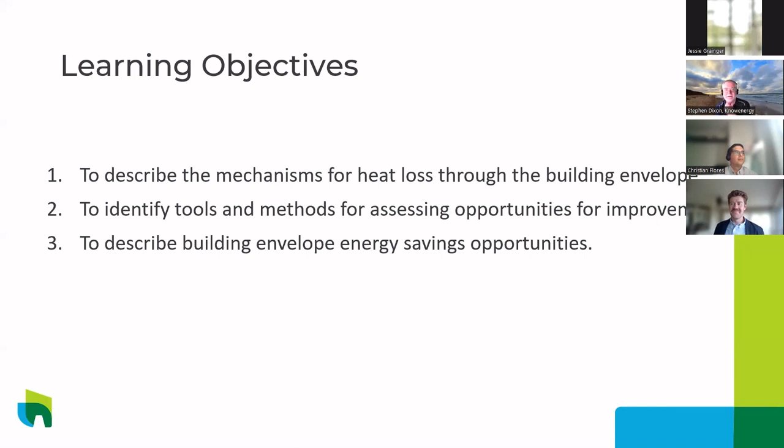Christian, we can move to the agenda very quickly. So what we'll cover off here in our agenda this morning, I'll let you get to the next slide there, is some very basic ideas around heat transfer principles. We'll look at the building as a system. We want you to think about your building as a system, not just, I got to fix those windows, but what can I do in a much more holistic fashion? And certainly getting to net zero, we have to take this holistic approach. And as a result, there is an order. And I'll speak to that one, and Christian will speak to that one too.

But basically, I have 3 words that I use. It's not written on a slide anywhere. Waste, energy we don't need to use. Efficiency, how well we convert the energy from the purchased or the acquired form to the end use form. And then supply, the use of renewables. So that says, before we put those solar panels or that renewable energy in, let's not waste energy, and let's be as efficient as we can.

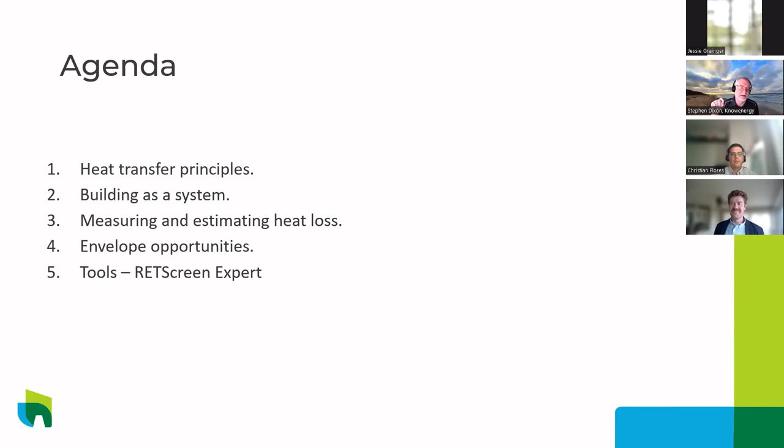So it's important to understand our building as a system holistically, measuring and estimating the heat loss, right? Where's it all going? What are the largest consumers? And it may be surprising. Sometimes we think certain things are the larger consumers, but when we actually get down to it, they're not. We'll take a look at what the envelope opportunities are, and then we'll finish off very quickly on RETScreen Expert as a tool. I'm going to show you a tool that you can use. You'll be able to jump in tomorrow and actually play with this one if you choose to do that. So Christian, let's move over to the slide on thermal heat transfer basics. For those that aren't technical, this slide will be a bit of an introduction.

For those that are technical, this is going to be like second nature. But there are fundamentally only 3 ways in which heat moves. In fact, there's only really 2 ways, and one is a sort of variation of the other way. So heat can be conducted between 2 bodies. We're all familiar with that. So in order to stem that flow of heat in the building envelope, we have to use an insulator. We're all familiar with that.

But there's another very important form of heat transfer, and that is that a body can radiate. Stand near a stove, you feel the heat radiated. A lot of people think when they stand near a cold wall that there's a draft, but it's actually the heat radiating from your body to that wall, right? So those are very important mechanisms.

Now, if you put a hot body in contact with, let's say, air or a liquid, you'll end up with what's called natural convection, because as the liquid or air heats up in contact with the body, it will rise, right? We know that. Or if we force liquid or air to come into contact with the body, it will transfer heat. So what we call convection, whether it be natural or forced, is really just a variation on that theme of conduction. So those are the ways in which heat moves.

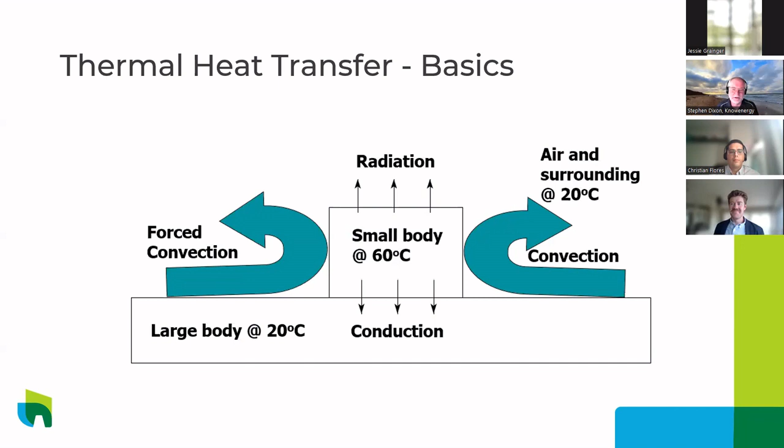Now, on the next slide, if we look at the building as a system, there are many, many ways that heat moves into and outside of a building. And certainly, again, we have to build an envelope. And the envelope really means a boundary, right? And we want to consider that boundary. And boundaries are very important in building envelope analysis. Christian will speak to that one.

So I'm going to let Christian take over here, and he will sort of gauge his time through this, because there's a lot of topics to go through here and not a lot of time, but basically what we want to do is think about how we can modify any of those heat flows out of, and maybe into a building, even including solar energy. Christian, over to you. Thank you, Stephen.

The only thing I'll add to this slide is thinking of the envelope as the skin of the building that separates the indoor from the outdoor environment helps us think about how we can actually improve the performance of the envelope. The envelope controls the heat loss by insulating materials and keeping things as airtight as possible. So when we look at retrofit projects, that's really what we're trying to focus on.

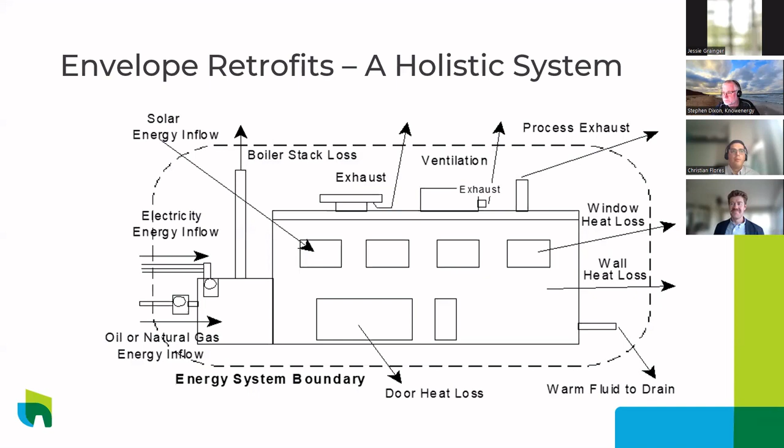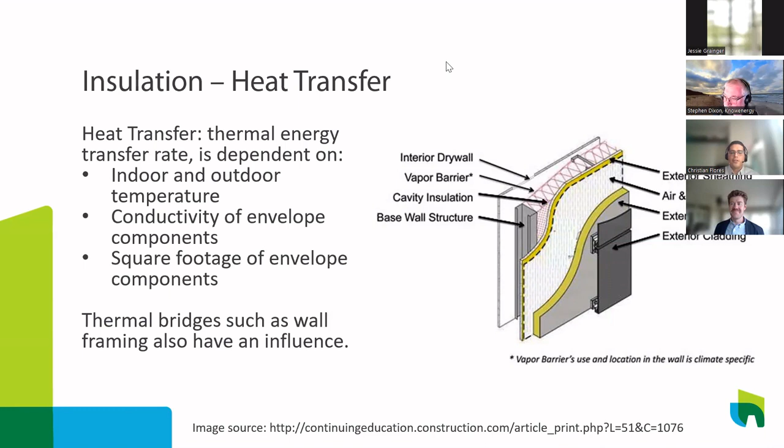The other thing about the fundamental physics of heat transfer is that heat will take the path of least resistance, right? So when we have a very highly conductive material, heat will tend to go out through that material. We call this a thermal bridge. A simple way of dealing with it is by insulating the outside of the building, having exterior insulation. It's the idea of you want to wear your sweater versus eat your sweater. That is how we tend to deal with thermal bridging issues.

Now, every material has some insulating value. This is called an R value. R stands for thermal resistance. So when we talk about the R value of a wall, we're including all the elements of the wall into that number. And as you can see here in this example, the R11 batt insulation is really doing the heavy lifting in terms of total R value. But one thing that this analysis doesn't take into account is that thermal bridging that we just talked about going through the studs. And we'll see how to account for that in a few slides.

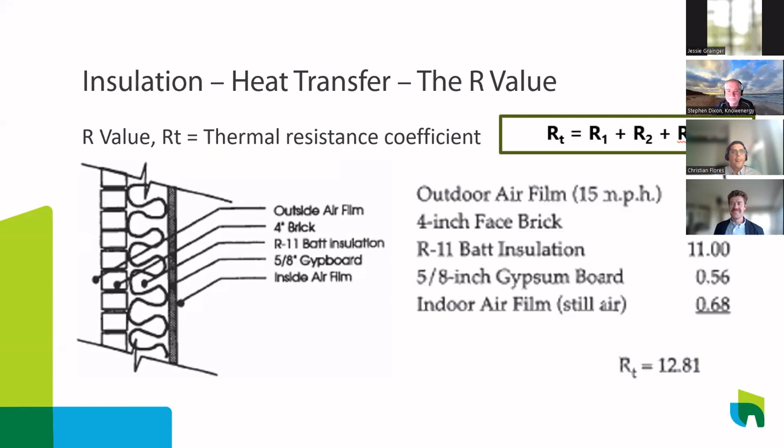So there's different types of insulation. Insulation can come in different R values. Typically, the higher R value you use, the more expensive it is, but not always. There's other factors that go into what material you use, such as vapor permeance or durability, and so on.

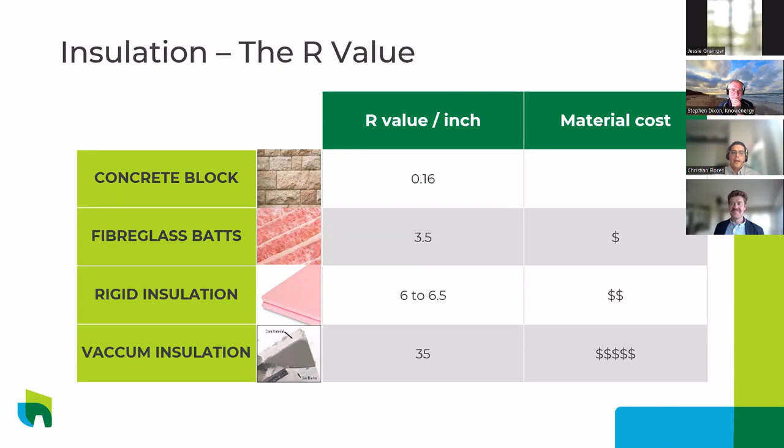The other main way that buildings lose heat is through air leakage. The control of airflow through our buildings is key for several reasons, not just for energy loss, but also to improve thermal comfort for occupants. Preventing condensation within the assemblies is a significant durability issue we run into. There's also reducing heat loss, controlling unwanted heat gain during the summer, and controlling infiltration of pollutants to maintain indoor air quality.

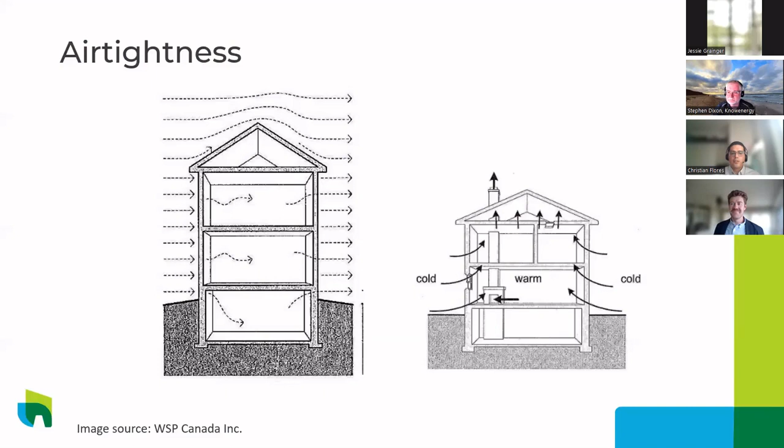Now, the mechanisms by which air leakage occurs - there are several. One is wind loads: wind can cause infiltration and exfiltration through your building envelope. We also have the stack effect, basically warm air rising, which is more of an issue in high rises. And we can have heat loss or air leakage due to mechanical HVAC interaction - if you have a pressurized building, you can get leaks through the building envelope as well.

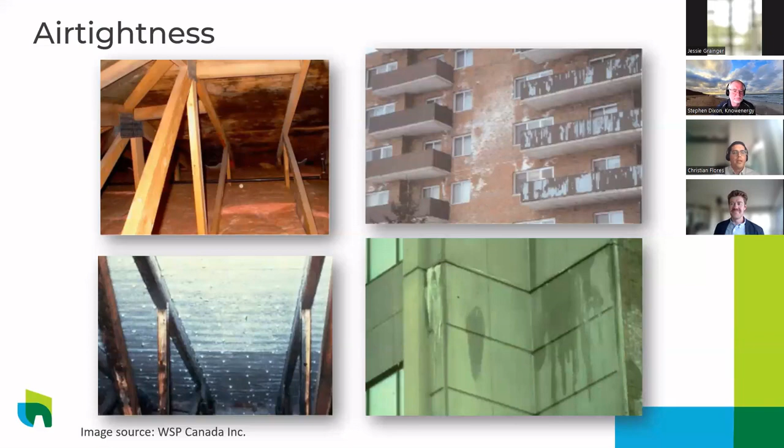Significant durability issues - we see this in walls too, with moist air condensing on brick causing efflorescence, or in precast, significant ice formation that can cause delaminations and serious safety issues. So there are other things to worry about with air leakage, not just heat loss, but that is our focus today.

Going back to the idea of building as a system, we need to take into account the thermal performance of the building envelope when we look at the performance of our mechanical systems. The insulation and air tightness of the envelope can only do so much. In our climate, we still need mechanical systems for heating or cooling, but the amount needed depends on the performance of our envelope. This is the idea behind building as a system.

Especially when we look at retrofits, increasing the performance of your envelope can allow you to use a cheaper or more efficient mechanical system because it doesn't have to condition the air as much. This is poorly understood still, unfortunately.

FCM shared some decarbonization study reports that municipalities often use, and we saw the envelope is barely mentioned in a lot of these, or sometimes not considered at all. So this is one of the critical takeaways today: when you ask for a decarbonization or GHG reduction study for your building, make sure they're taking the building envelope into account, because it's a significant item that impacts your energy performance.

I should add, Christian, that years ago I was exposed to a presentation by an architect, 47 slides on what happens when you add insulation to a building while respecting the airflow and equilibrium that exists within the envelope itself - much like the slides you showed on moisture. So we not only have to focus on the envelope as a system, but think about the interaction between insulation, airflow, and moisture. It's a very complex issue, even though it seems simple enough in a picture like this.

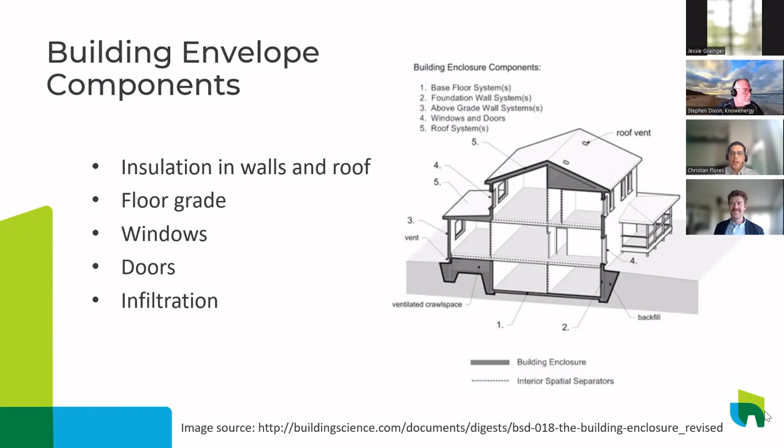And Stephen, I think there might be some questions in the chat. I can't see the chat. Yeah, I'm monitoring those, so okay, great.

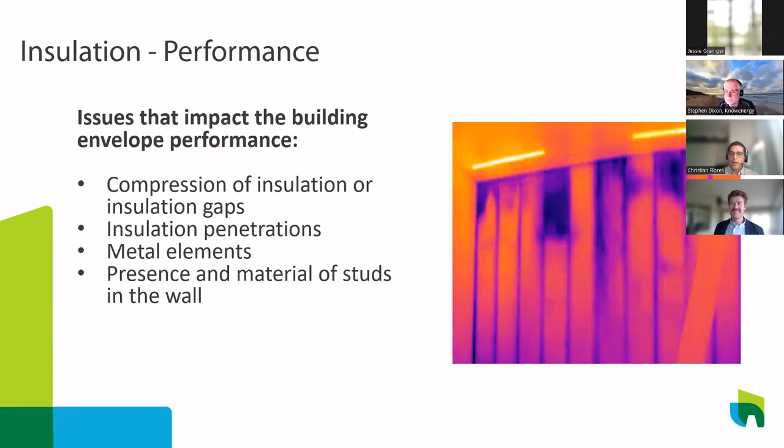As we saw, the performance of the insulation in your walls can depend on the overall envelope design and construction. Thermal bridging through the studs has a significant effect. If you have, say, R20 insulation in a steel stud wall, the studs will reduce the effectiveness of the wall by 50% easily. Other elements that reduce performance include improper installation of the insulation or penetrations through the wall that cause even more thermal bridging.

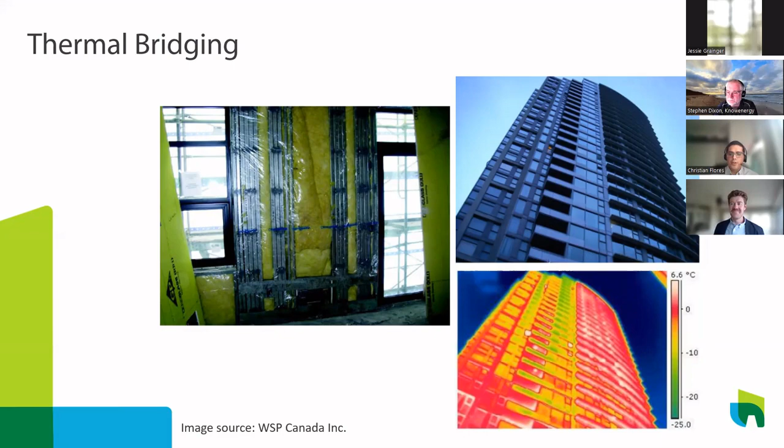We look at balconies being a huge thermal bridge, and you can see that in the thermography scan at the bottom right there. The slabs are just glowing with heat, and that's because there's no insulation stopping the heat loss through the slabs. That's a significant issue when we look at those high-rise residential buildings.

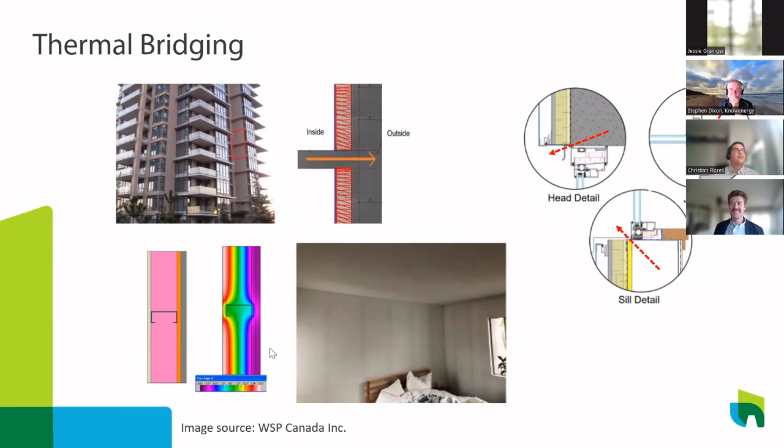Okay, there we go. So windows are a very important part of our building envelope. They provide lighting and create a connection for the occupants to the outdoors, but they're also the weakest point of our building envelope in terms of thermal performance. Glass and metal are just not good insulating materials.

We've figured out how to make better windows by adding more panes of glass and hermetically sealing them together using fancy inert gases in those cavities to reduce the conduction heat losses, using low emissivity coatings on the glass panes that reduce the radiation losses or gains. When we look at retrofit projects, the windows are often the low-hanging fruit when we look at retrofitting buildings, because decades-old window systems just don't have very good thermal performance, and we can double or triple their performance with common modern systems.

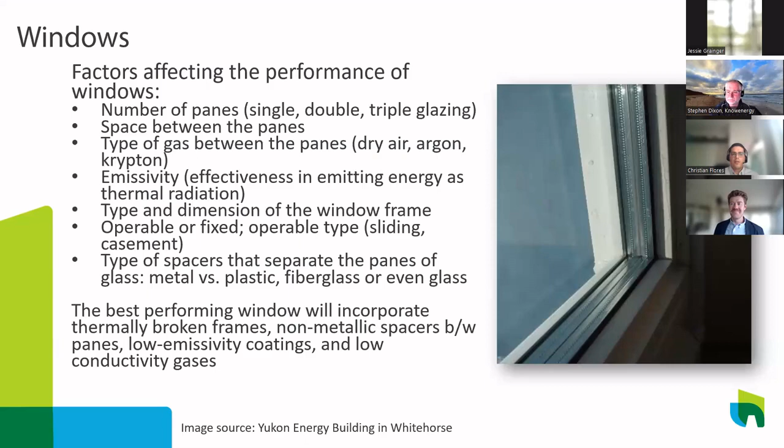Doors similarly have R-values that we need to take into account, though it's more important to look at the air tightness when you look at doors. Make sure that they're well sealed, because air leakage is the main cause of heat loss through doors.

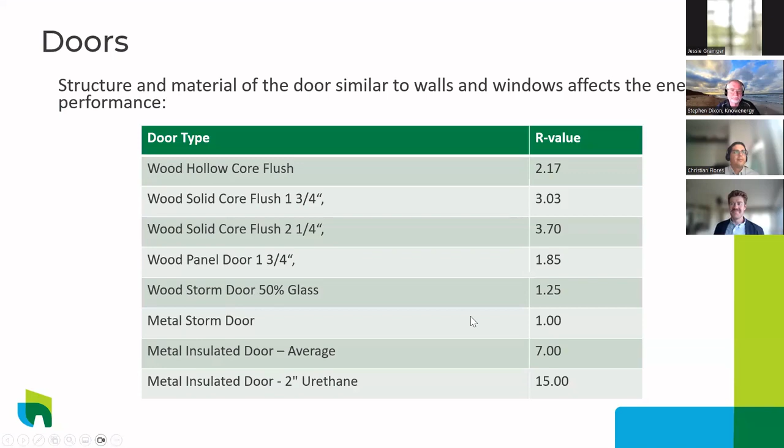Air leakage can be quantified by using these blower door tests. Basically, we hook up big fans to the doorways and we pressurize or depressurize the building. We see how much airflow is flowing through them, and we can take that value and punch it into the energy model and see how much energy loss we have throughout the year because of these air leakages.

It can also help us identify where the air is leaking from by using different techniques like thermographic scans or smoke machines, smoke pencils, things like that.

Christian, I know a lot of people say we use those on residential applications, but you can't really use them on commercial. But they have been used on commercial. I once saw a 12-story condo - they used 6 blower door fans, and it worked. You can also, in some cases, use the HVAC system, depending on the situation, to create the pressure to create the measurement too.

So these techniques can work on much larger buildings and probably need to be done in order to understand really what the infiltration, exfiltration issues are.

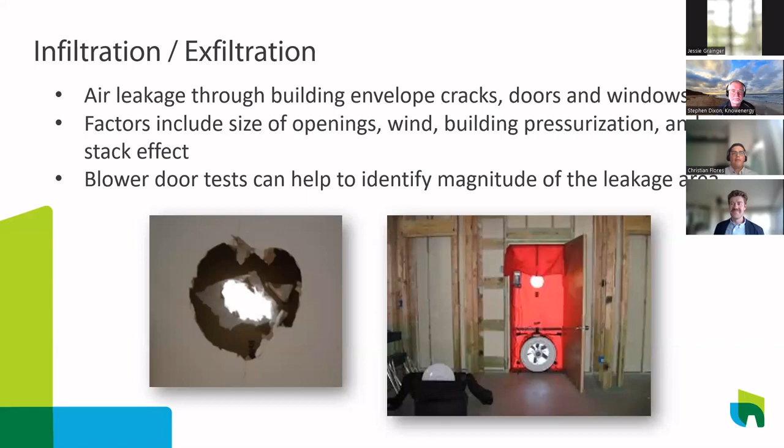Definitely. And some building codes and municipalities are requiring whole building air tightness testing for all new construction, such as Vancouver - if you're building even a high-rise building, it needs to be fully air tightness tested. Now, there are ways with really tall buildings to do a zoned test so that you're not pressurizing the whole building. That's a little bit outside of the scope of this presentation, but just so that you know there are a lot of different ways that we can quantify air leakage.

So with all this knowledge, what have we done? We've built towers made out of metal and glass. These towers have an overall R value of around R3 or R4, which turns out to be the same R value that a hut made out of mud would have. So have we really made much progress?

But architects know this, builders know this. There are just other market forces that account for this type of construction. People like having large windows. Glass is a relatively cheap building material, but things are starting to change with modern building and energy codes becoming more stringent and requiring building envelope specific performance. Higher tiers of the Toronto Green Standard or the BC Step Code, for example, will require such performance that these glass towers really won't be possible. They just can't provide enough thermal performance, no matter how many panes of glass you use.

So what you're saying, Christian, is we know how to do it. We just have to now create the will in our organizations to actually do it and use the technology we understand. That's right, and legislation and building codes are helping with that. So we see a lot of these designs changing. As I said, I work a lot with new construction, and there's a lot more pressure on making sure that our window to wall ratios are sufficient to allow for a whole building thermal performance that's required by code.

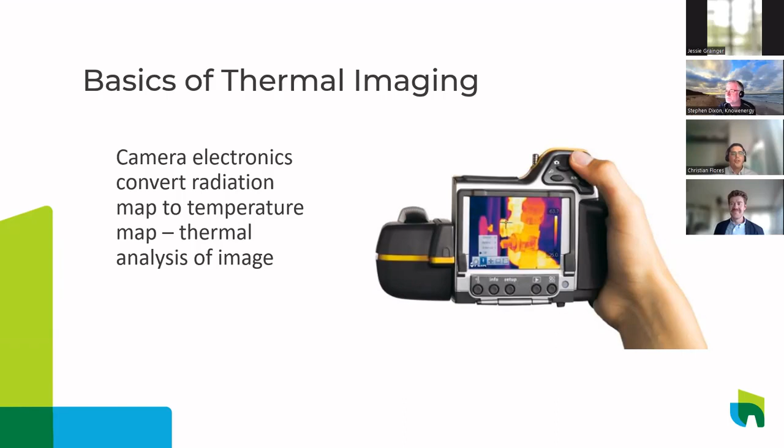So one way we can account for heat loss is through thermal imaging. That's one of the tools we use. It can show where air leakage tends to happen, where we have thermal bridging, where window panes might have failed. It also helps with other durability issues, such as roof leaks and so on. I think we have some images of those.

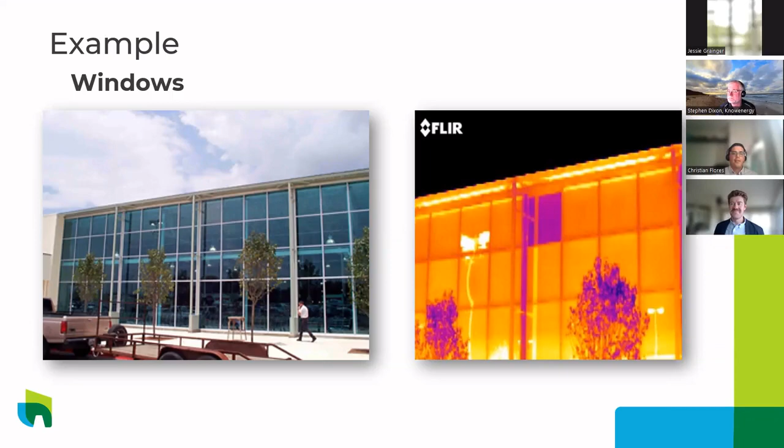So in this example, you can see that on the image on the right, the purple pane of glass has failed. So the seal between the two panes of glass has failed, and there is air from the inside or outside coming into that pane of glass, which reduces the thermal performance.

We have, in this example, one of the windows, one level of the windows has been replaced and the other one hasn't. This is taken from outside in the winter, so I don't know if you can tell, it's the top one that has been replaced. It's allowing all the heat from the inside to escape, and that's why it's glowing red hot in the image.

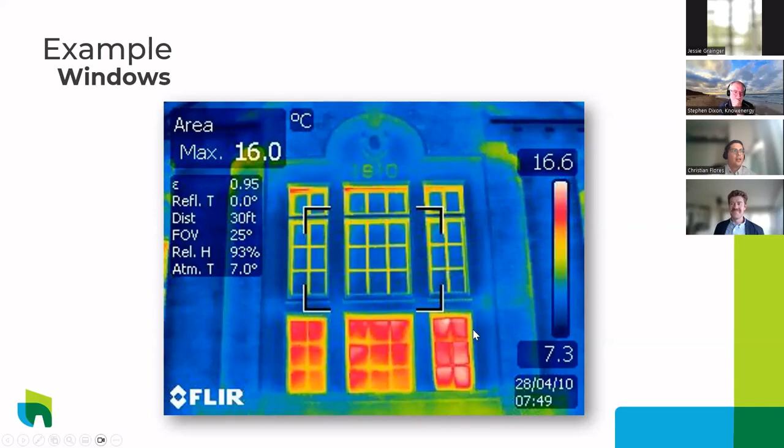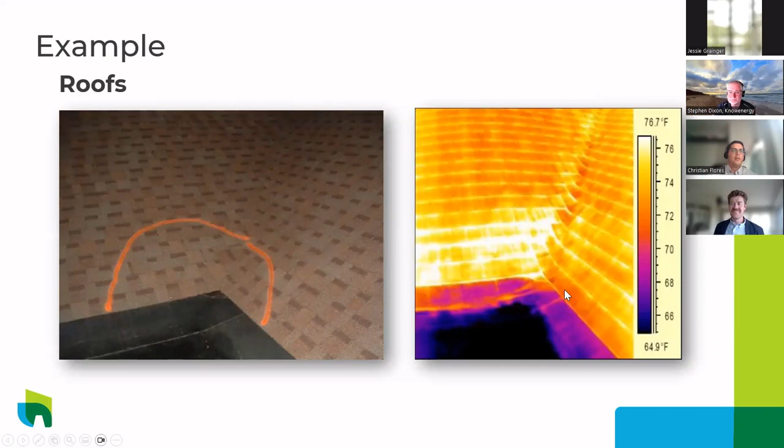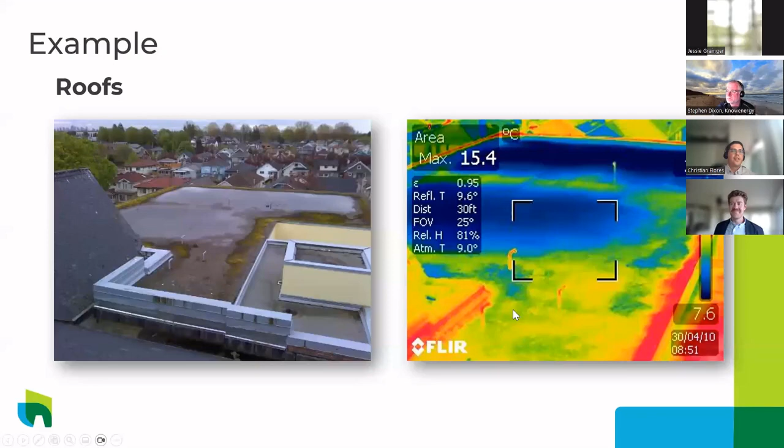On flat roofs, it's commonly used where if we have a leak through the waterproofing membrane, the insulation will get wet. That insulation will stay warm even overnight. So if we go at night and do a thermography scan, you'll see highlighted areas of insulation where the roofing membrane might have failed.

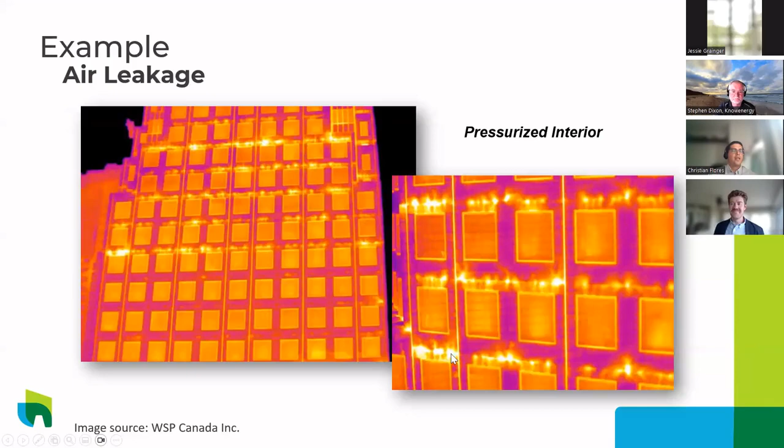And then it also helps with air leakage, pinpointing where we need to do a possible air tightness retrofit. In this commercial building, we pressurize the inside of the tower just by using the HVAC system, as Stephen mentioned we can do. And you can see a lot of air leakage happening through the panel joints of this precast building.

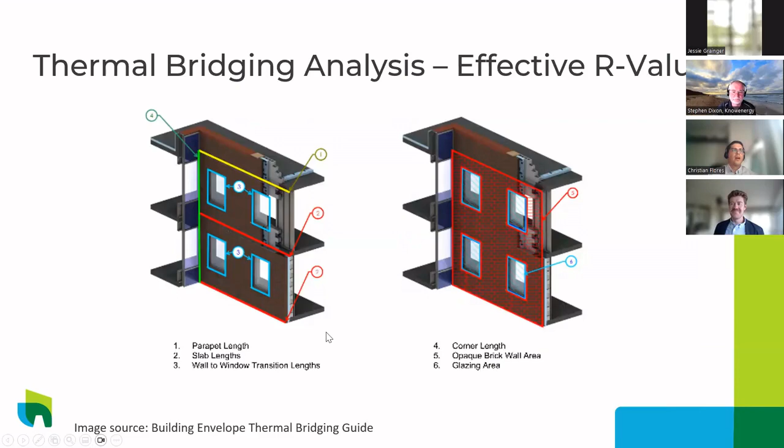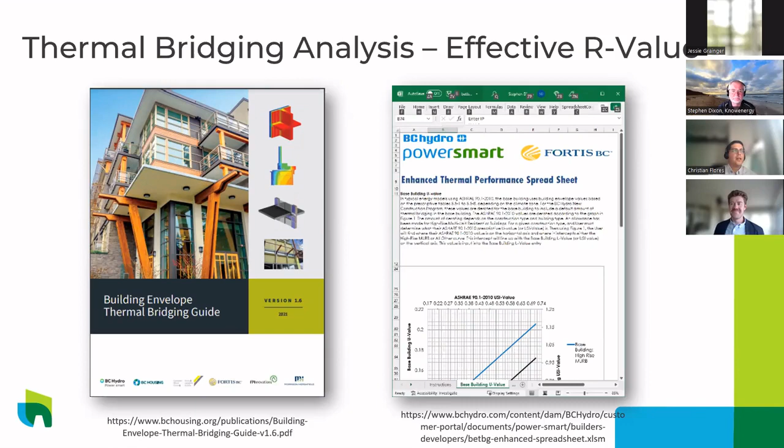Now quickly, thermal bridging. There are ways to calculate your thermal bridging R value. You can see where the thermal bridges tend to happen at the base of the wall, at the perimeter of the windows, at any slab interfaces, wall to roof interfaces, and so on. These are all calculated together to create an effective R value. If you are curious, you can look at these references on how that calculation is actually done. BC Housing and BC Hydro have done a lot of work in this space, so you can check that out.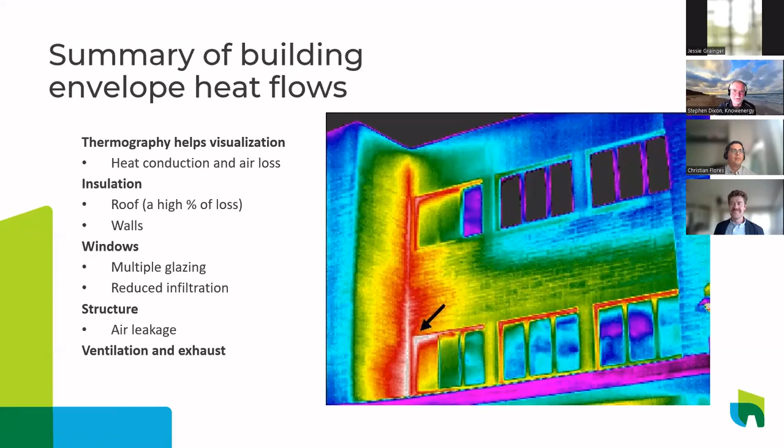Okay, so this is the meat of the presentation. This is where we want to show some examples of projects we've recently done at WSP. As I said, a lot of decarbonization studies don't take into account building envelope, so we want to show how we approach that for our studies.

At first, we need to consider the building and the building's life cycle to try to identify when these retrofit projects can occur. The point is we need to plan early, because as problems arise, building owners tend to restore or renew facade components that need immediate attention, like leaks, cracks, or safety issues. But we need to zoom out and look at the bigger picture. What's a more efficient and effective way to maintain your building enclosure while meeting the overall needs of the building, including energy performance, or if your municipality has an energy target, we need to consider the whole building life cycle.

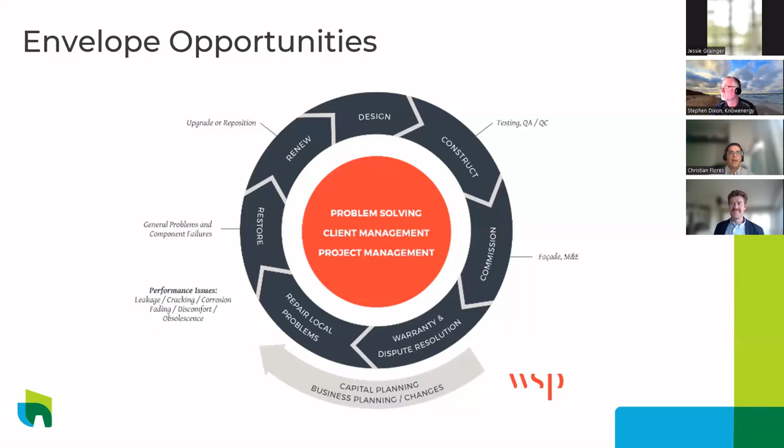This is just an example of a building that was built in the 70s. A lot of our building stock was built in the 70s and 80s, especially for commercial buildings. The point of this slide is to focus on when we can run these holistic, large retrofit projects. For a building of this age, the 90s would have been a good time to replace the HVAC and building envelope systems, because that's the life cycle we see with these components. Most of the time this wasn't done, and the HVAC system was replaced with something similar or slightly better.

But now we're seeing those systems needing full replacement as well, and that can be paired up with other facade components like curtain walls, which tend to have about a 40-50 year lifespan, making sure we're again thinking of the building as a system, reducing loads, and designing our mechanical system to meet those reduced loads.

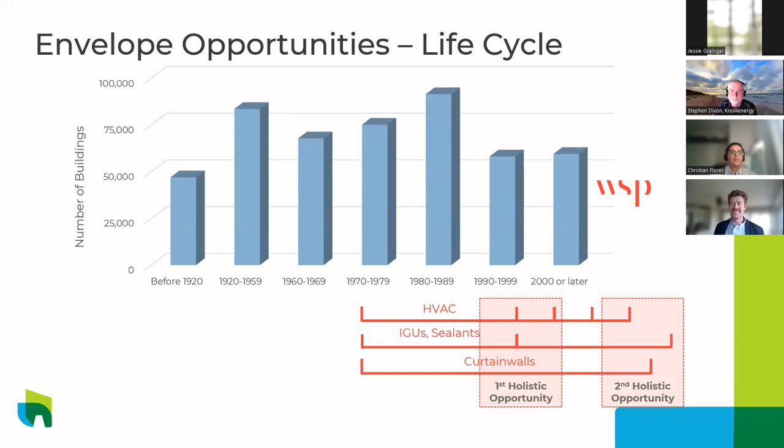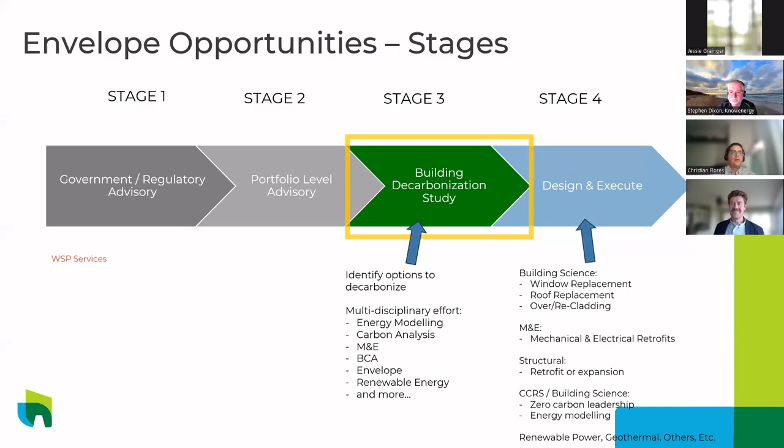So at WSP, we've been involved with every stage of this type of project. Today we're talking about decarbonization studies, but we also have a significant number of buildings moving on to the execution phase, where we're actually doing these large retrofit projects that include window replacement, overcladding, roof replacement in terms of building envelope, and then mechanical systems are also being retrofitted and improved, with renewable energy also being considered. So we'll look at some of those next.

But in general, these are some insights we've gathered from our work thus far. Number one, there are no silver bullets. Every building is unique, and we have to rely on good building science and planning to make sure these projects happen in the short term to meet our long-term energy goals.

Major enclosure upgrades typically occur once every 20 years. That's just a rough estimate, but it's to say we need to make sure... I'm getting a 15-minute warning, that's great. We need to make sure those projects are lined up with the mechanical HVAC upgrades.

Set minimum targets, use long-term analysis. Simple payback period analysis for these projects sometimes isn't beneficial because they are large investments. At the same time, we need to set minimum energy targets because there are many different ways to meet those reduced energy goals.

We need to explore every option, aligning with incentives, funding, and financing, prioritizing portfolio or neighborhood scale action, bundling projects together as much as possible to improve economies of scale, and iterative analysis and planning. The building as a system requires us to think of reducing loads first and then seeing what mechanical systems we can use. We might be able to use smaller, more efficient systems. So that should be an iterative process.

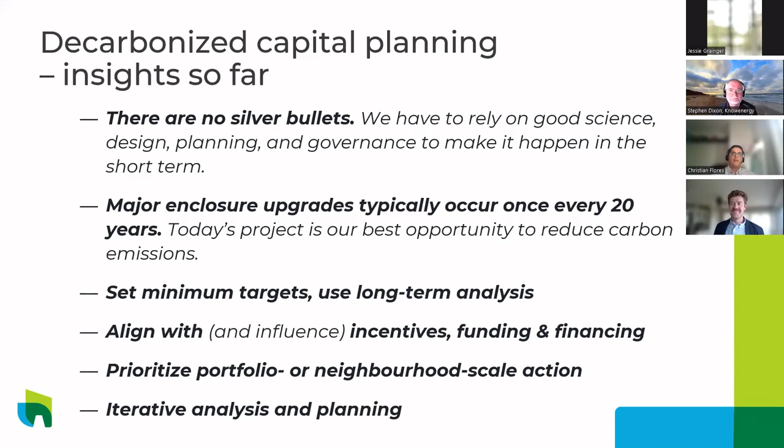So Christian, one of the things I'll mention to folks, and the folks from SEM can put a link to this, but back in January I did a seminar for the SEM conference in Ottawa on life cycle costing. So looking at life cycle costing, you said simple payback isn't a good measure. It's not. But life cycle costing, where you look at the lowest life cycle cost over the life cycle of the building, is a very good way to incorporate building envelope into a financial analysis. So I'll let somebody from SEM post a link to that recording, I'm pretty sure it's online. Back to you. Perfect.

So what does the actual process look like for these projects? Typically we start by establishing the existing systems and the baseline performance of the building. Then the team includes specialists from different departments to collaborate and develop different measures or improvements to each system. Then the energy modeling team packages those into different options to meet different levels of energy or carbon performance.

In a multi-unit residential example, we often look at insulating the walls from the inside or improving the R value from the outside through recladding or overcladding. For HVAC systems, the team will evaluate different systems and potentially fuel switching to alternate systems with improved efficiency, and looking at renewable power such as PV or geothermal.

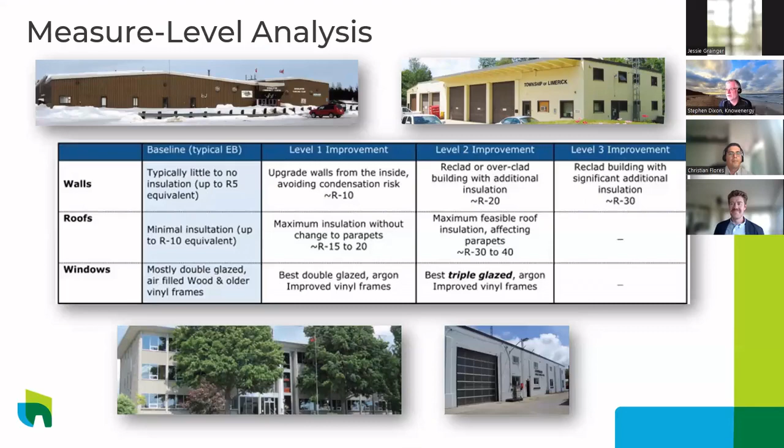That's great, so we knocked up a few questions there. I just want to get those done because they're kind of relevant. Perfect, and it saves a bit of time at the end. Go for it, appreciate that.

Okay, here are some examples of some recent projects. Sometimes we see facades that are deteriorated and need significant interventions in the short term. For these buildings, mechanical retrofits were also required. Given the level of repairs, the client wanted us to see what possible upgrades we can do to achieve net zero performance.

But because the enclosure, the facade was in a state of disrepair and it was becoming an urgent issue, we were able to squeeze in a preliminary RETScreen analysis, which Stephen will talk a bit more about, to help with the decision-making for the envelope upgrades. With a RETScreen model, we can see, okay, if we use 4 inches of insulation and we upgrade the mechanical systems this way, what is the total energy reduction?

So with that analysis, we were able to pinpoint, okay, we actually need 6 inches of insulation here. We need a window that has an R value of so-and-so, and maybe the roof we can leave aside. So that is the benefit of doing a RETScreen analysis for these two projects. Had the envelope repairs happened without the modeling, it would have been a lot more difficult to achieve those net zero goals, and in the end result in a less optimized design.

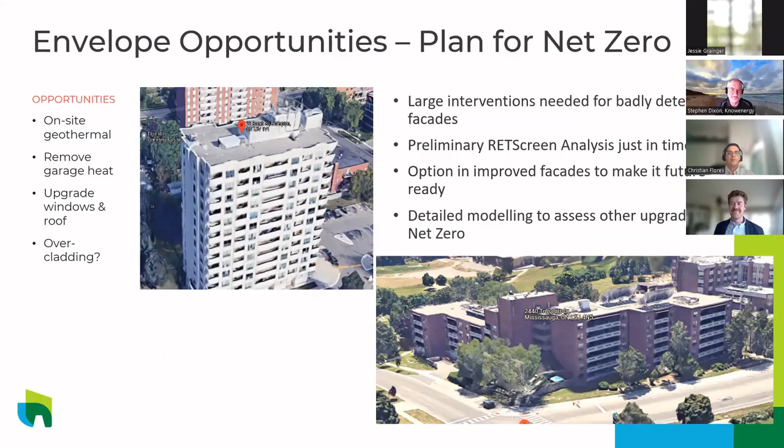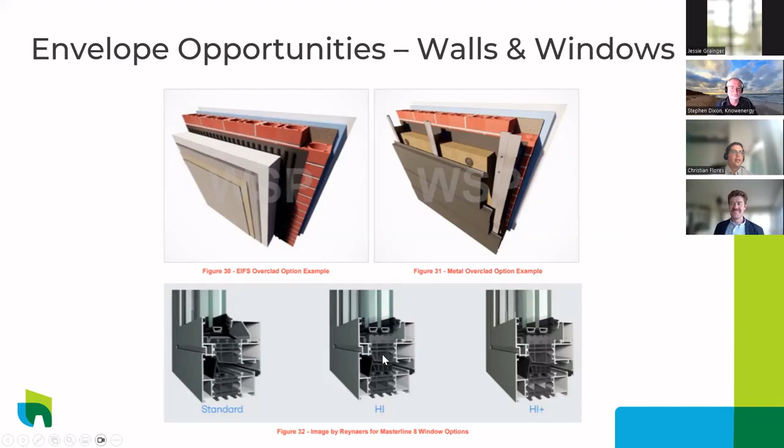And at the bottom, those are some high performance window systems. You can see the aluminum is separated by that black polymer that's called a thermal break, and in these systems the thermal break is large enough that we can get a really good R value from these window systems, and the cavities are fully insulated as well.

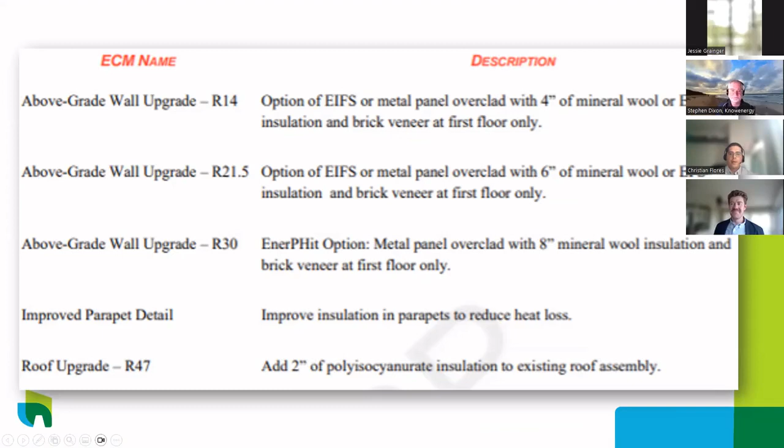So once we look at all the elements of the building envelope and how we can potentially upgrade them, we list them in the study. Then the energy modeling team bundles them together with the mechanical and possibly renewable projects that we can undertake, and we can calculate the total GHG emission reduction, or the energy use reduction. And as I said, there's different ways to get to the same goal. So these are 3 different options that we presented for this project.

Option 1 was using EnerPHit principles, so the passive house retrofit guides, and it resulted in a much more thermally efficient building. We also looked at a hybrid approach and a least cost approach, and you can see at the bottom in the table what the GHG emission reduction was and the energy use reduction as well, compared to the owner's RFP target. So as I said, there's different ways to achieve the same goal. We just need to take a building as a system approach to all these projects.

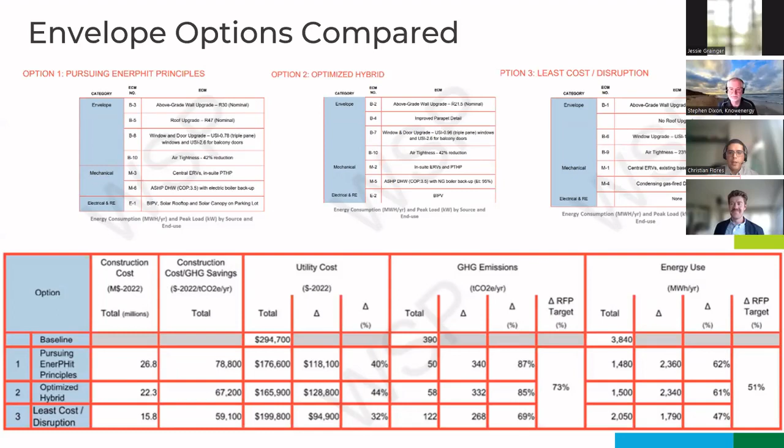That's great, Christian, because that's a great segue into the tool RETScreen Expert. Some of you may have seen it, some of you may not have heard of it, some of you may have heard of it. You could all tomorrow go and download a viewer version of RETScreen Expert from www.retscreen.net. We probably should have put that on a slide somewhere. We didn't, but www.retscreen.net, and you can download a free copy. You don't have to license it, and you can try the things out that I'm going to show you here just in the free version. You won't be able to save things in the free version, but you'll certainly be able to give it a try. So what I'm going to do is introduce you to what's called the Virtual Energy Analyzer.

So slide 46. So the next slide there, Christian, talks about municipal building archetypes. An archetype is defined as something that's very typical of other things. So RETScreen has actually built a whole series of very typical models of different kinds of buildings. One of the questions asked in the Q&A there was, what about retrofit of building envelope measures in different geographical or different climatic locations? Well, these archetypes are designed to do just that.

So you can take an archetype, say, of a fire hall. I've got one shown there, and it's a typical building, looks like a fire hall. It's got a building envelope attached to it. It's got HVAC systems, and you can say, okay, put that building in Ottawa, put that building in BC, put that building in St. John's, put that building in Saskatoon. You could literally pick it up on the map and move it and see the results, right?

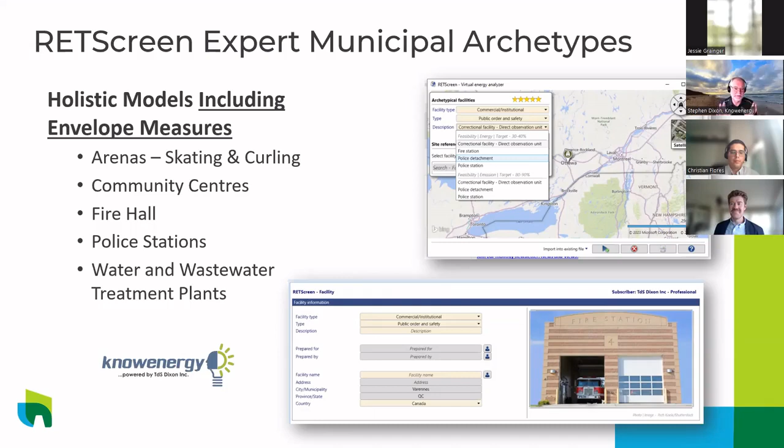Okay, what if I have a building like a fire hall, a community center? What might I do to take that building to a 40 to 50% reduction in energy, or an 80 to 90% reduction in greenhouse gas emissions? So RETScreen's Virtual Energy Analyzer with its archetypes is the tool you can kind of go and play with. It's kind of like a game, but it's very real.

Next slide. We just look at an arena archetype. So in the arena archetype, we have all the different parts of the building detailed, the energy used in each of those different parts of the building. But on the right-hand side, somebody asked about the distribution of the contribution of the different systems in a building and maybe the savings. Well, that's a pie chart of all of the savings opportunities in that archetype, which is built into RETScreen.

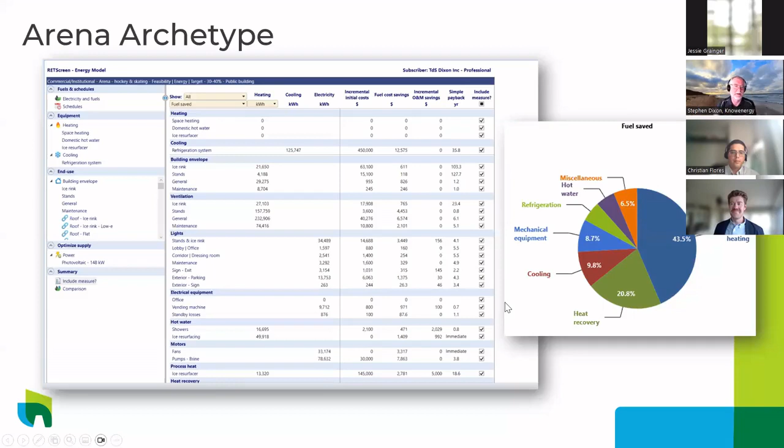So all you got to do is open up, because I think this is the arena archetype, and it's the 30 to 40% one. So it's not a full net zero ready archetype, but basically it's a pretty aggressive archetype. And that's how the savings break down between the space heating and the heat recovery and so on. But you can see space heating, which is largely building envelope, is a large component of the opportunity in that building.

Going a little further on the next slide, we can actually see some more that you get out of this. So if you want to know the carbon contribution, this is another archetype. This is actually a fire station. You get the pie chart of where all the heat losses are, where the savings are, but you also get that nice little bar chart which shows you 56% reduction in CO2. You move that building to Alberta, you move it to St. John's, you move it to Banff, wherever you put it, it's going to tell you that same number.

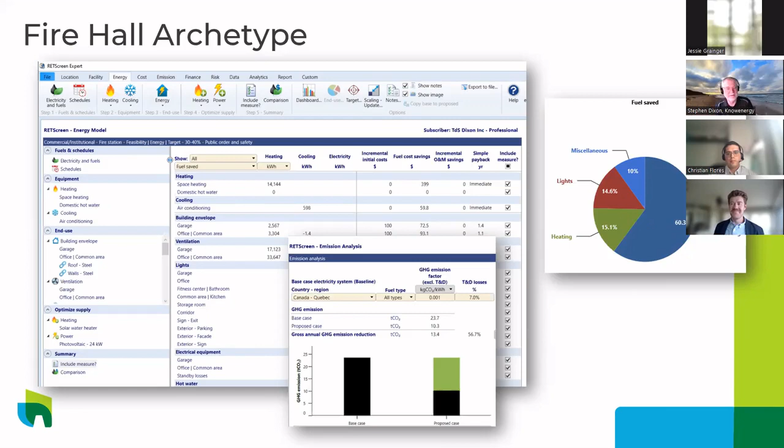So you can kind of play the what if I do this. And what if I change? Maybe you want to get more aggressive with the insulation in the roof. Maybe you want to put a higher performance window in. So in the next slide here, we'll see the building envelope model, and that's where you can actually go in and change the values, the components of that building. That's the building envelope model for one of those archetypes.

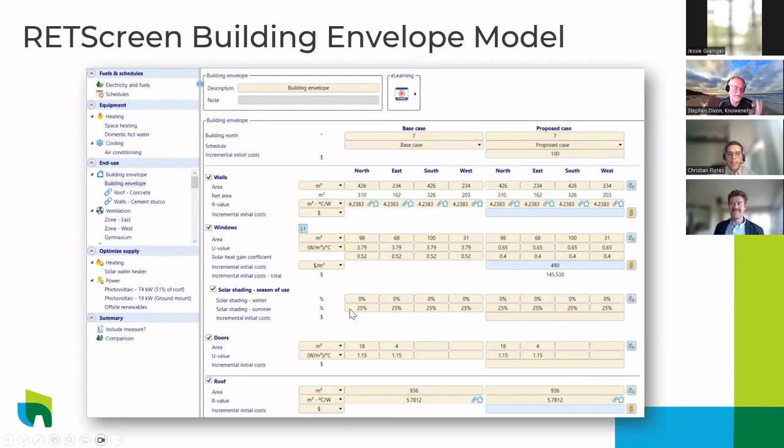All right, it's complicated, but it's not as complicated as a lot of other models. The beauty of this tool is it gets you to an answer much quicker than some of the other more detailed simulations. So RETScreen is becoming quite widely known for that purpose.

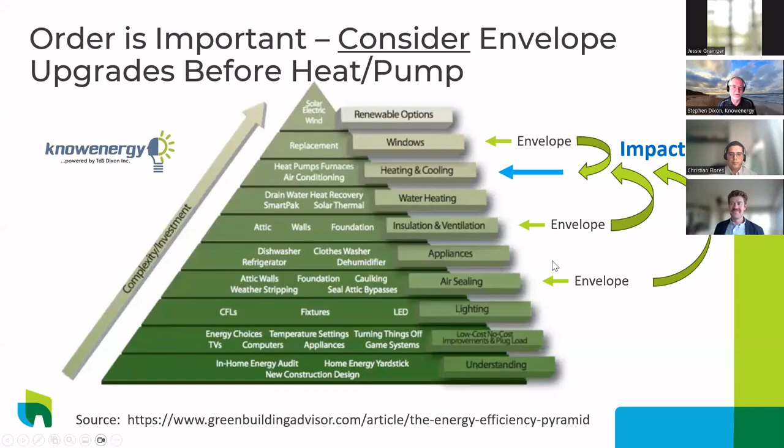So there is an order, and it's important. Next slide. There's some good guidance around this. There's a guide called the Major Energy Retrofit Guidelines, available from Natural Resources Canada at that website. And within that guide, on the next slide, we'll see that they talk about this order. So existing building commissioning, lighting upgrades, and it's a fancy term, supplemental load reduction. But inside that is building envelopes.

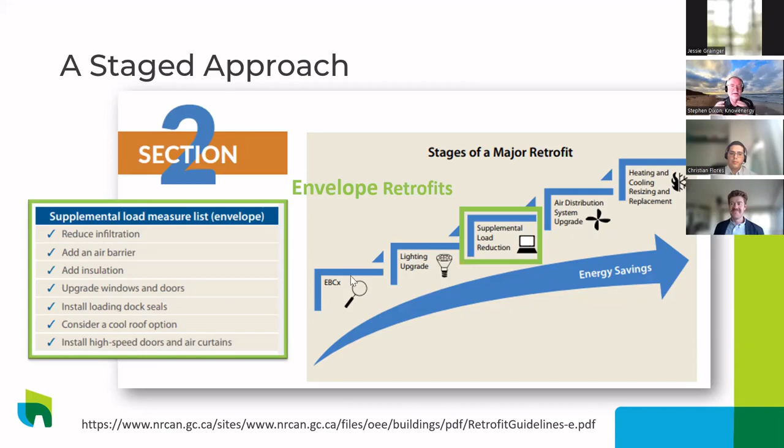If you go in there and look at it, it says these are all things you've got to do, because the next step in that major retrofit is the air or water system distributions and upgrades to those, and then the heating cooling equipment itself is where you do your heat pumps and your renewables beyond that. So firmly in the middle of the critical path is the building envelope. And you alluded to the fact that oftentimes we see these studies that don't actually do good consideration, do their diligence around the building envelope. Very important.